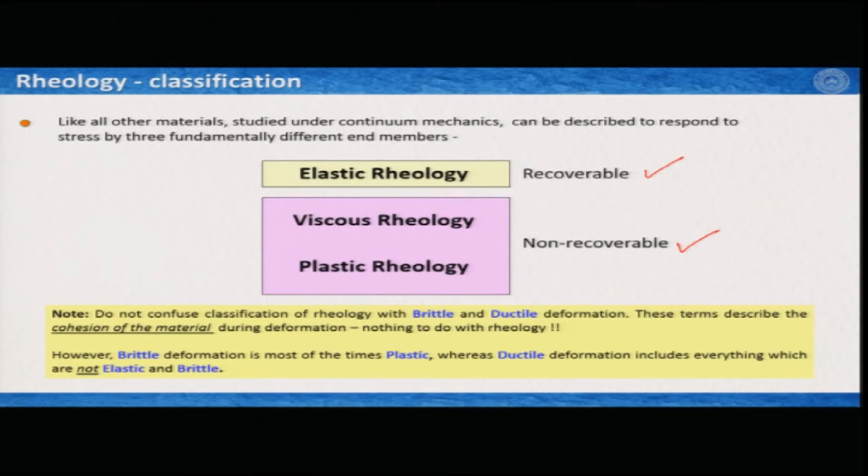I will mostly show you the classic considerations of these three rheological terms, their analog visualizations, that is, the best way to represent this rheology with some known materials we have, and then we will derive some different material constants or rheological constants, and we will see their implications also in the study of structural geology. So, let us start with the elastic rheology.

Now, the definition of elastic rheology is given by Hooke's law, and it says that stress is linearly proportional to strain and the latter is fully recoverable. As I said in the previous slide, in elastic rheology you can recover the strain, and elastic rheology is best visualized by a spring, or you can have any elastic band or rubber band: if you stretch it, it expands, and if you release it, it comes back to its original position. But if you stretch it more, it does not come back to its original position, but that is something different.

So, let us see what we can take out of it. We have this particular group of images here. This is written T1. At T1 we have one spring, it has a finite length, and then at T2 I have added one little load here with this green bar. Because I have added this little load, if the spring is hanging and I add a load at the end, the spring would expand, and therefore the length has changed. If I add more load, the spring would further expand and change the length, and so on.

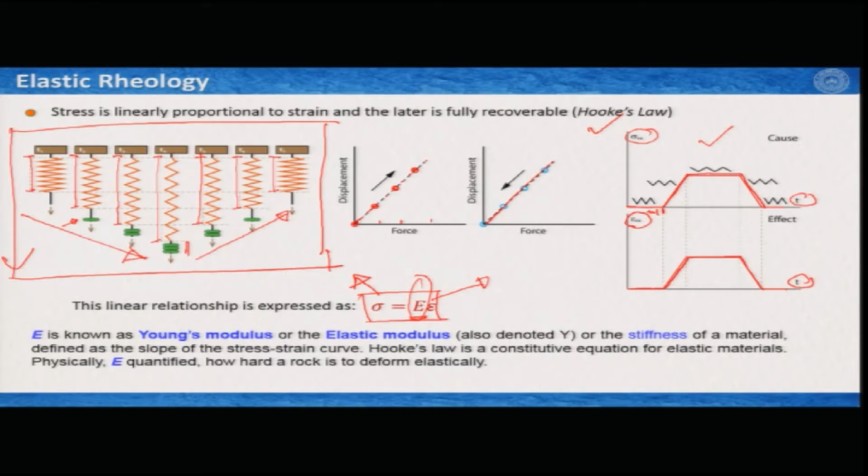Now, to talk more about elastic rheology, as we have understood, elasticity is time independent. That means, it does not matter how long you keep the green bars, it would stay at its position, and when you remove the green bars, it would come back to its original position. It is not a function of time. Therefore, the ideal elastic material would come back to its original position irrespective of the time the stress is being applied within the elastic limit.

And of course, the rate of stress application would increase the rate of deformation linearly. Now, if I add more green bars and I do it quickly, then the elongation of the spring would happen also very quickly. So, stress versus strain is a linear curve. This is the relationship we got: sigma equal to E multiplied by strain.

So, therefore, the slope is your E or Young's modulus, and if I increase the stress rate, that means if I increase the loading rate, then strain rate would also increase linearly. So, we can write sigma dot, which is actually sigma by t, equal to Young's modulus times epsilon by t, or epsilon dot. So, this is again the Hooke's law.

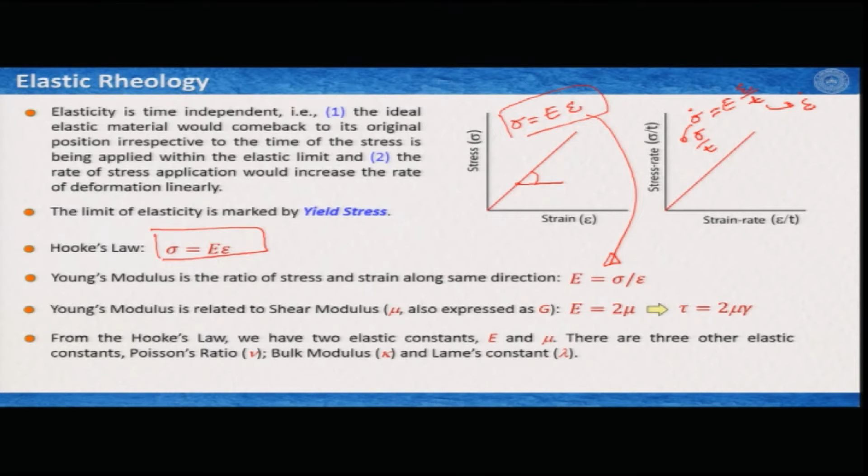Young's modulus therefore, from this equation, is the ratio of stress versus strain along the same direction. That is important: you cannot measure stress in one direction and strain in another direction, divide them, get a ratio and say this is my Young's modulus. That is wrong. You have to measure them along the same direction.

Now, you can replace Young's modulus by another constant, which is called shear modulus. So, if you shear this elastic material instead of extending it, this is known as mu, and sometimes it is also expressed as G. So, you can equate Young's modulus to twice the shear modulus, and then Hooke's law takes the shape of tau equal to 2 mu gamma, where tau is your shear stress, mu is shear modulus, and gamma is your shear strain.

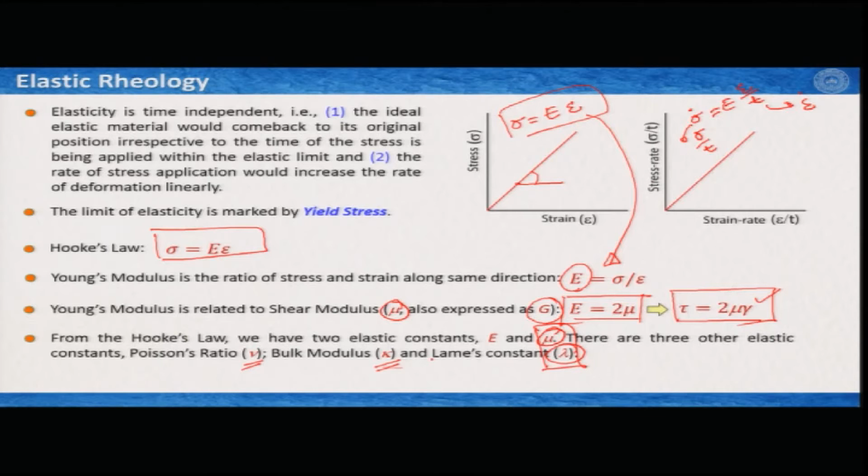So from these we have already found two constants, one is Young's modulus and another is shear modulus. However, from Hooke's law we can also get three other elastic constants: Poisson's ratio, bulk modulus, and Lamé's constant. In fact, in some textbooks mu and lambda together are referred to as Lamé's constants. Poisson's ratio is generally referred to by the Greek letter nu, and bulk modulus by the Greek letter kappa. Let us see what is Poisson's ratio.

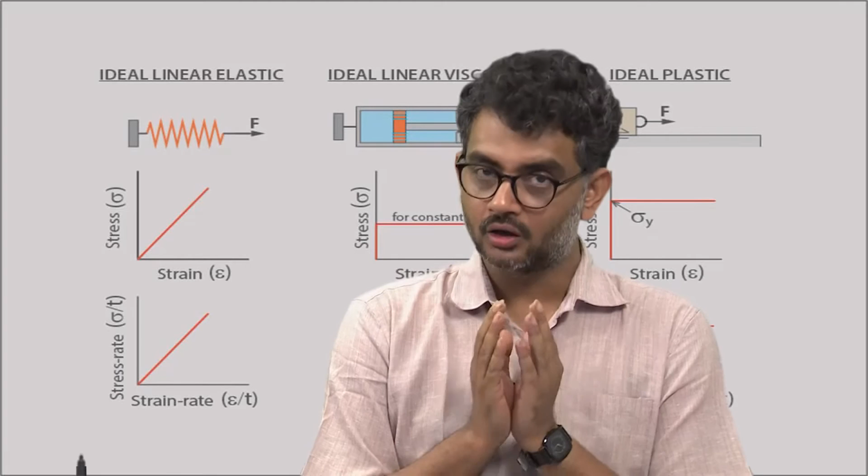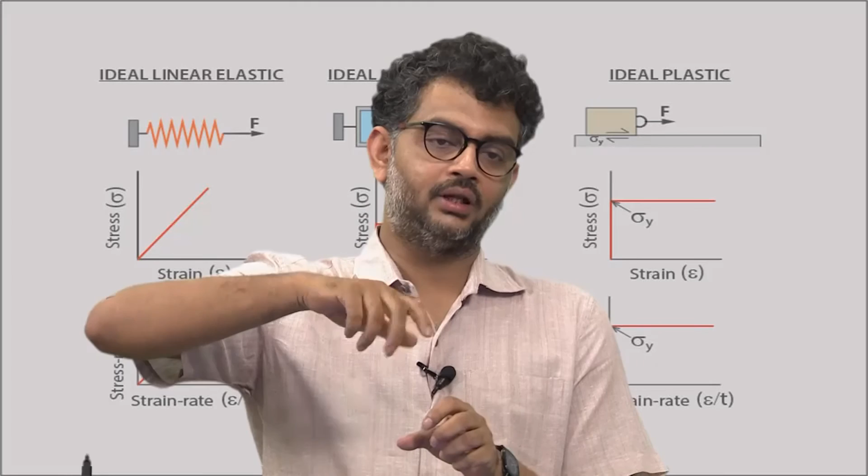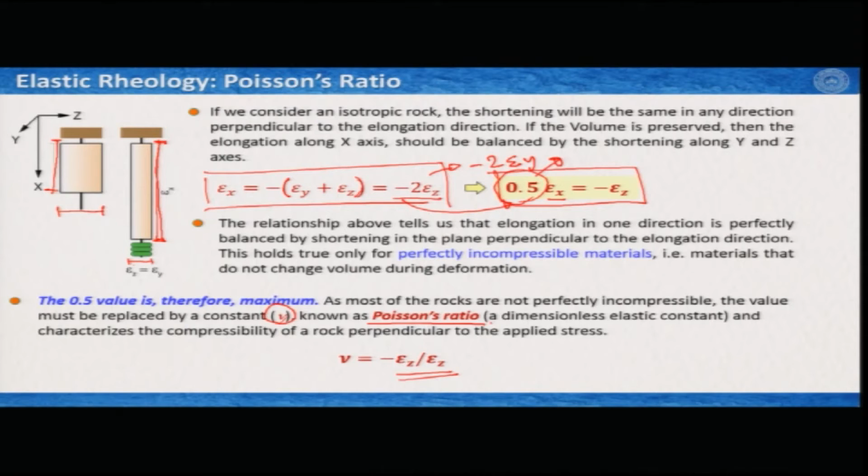Now, I give you a very simple example of Poisson's ratio. You may have seen some glass bottles where, instead of caps, we seal the glass bottles using corks. Now, corks are a very interesting material, because if you have the bottle and you have to press the cork inside, and if the cork has to maintain its volume constant, you are compressing it this side, so length is shortening in your compression direction. So, it has to expand in the other direction.

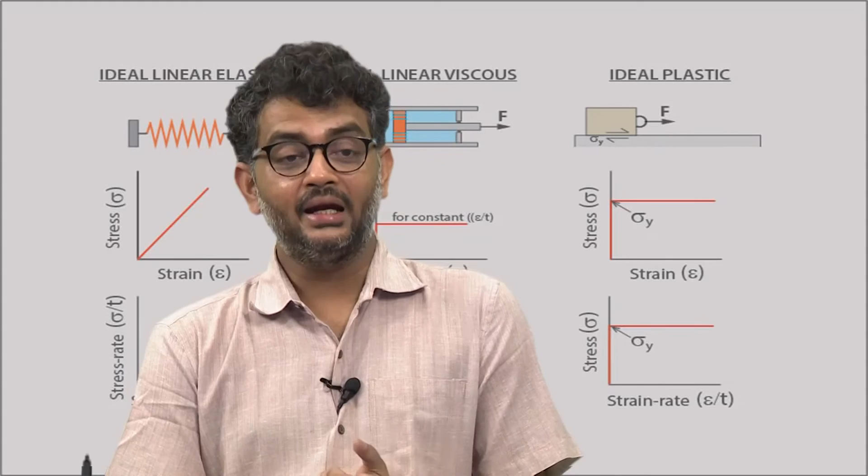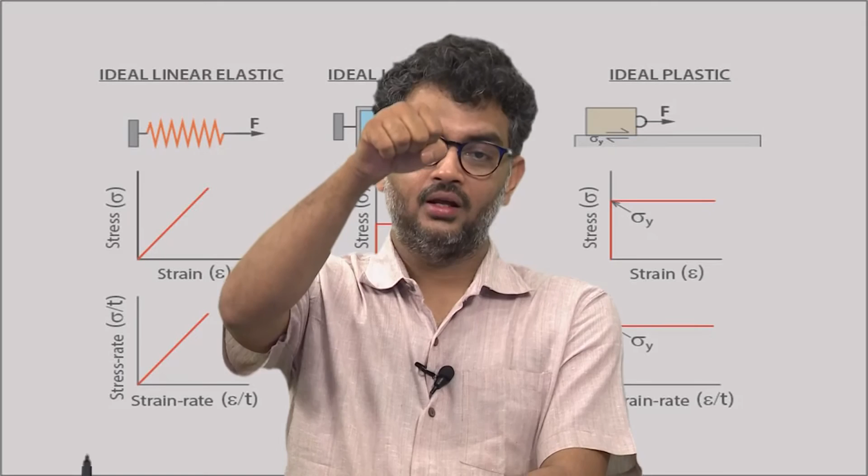That means the cork is now expanding and it cannot go inside the bottle's mouth. But cork is such a material that this expansion is very small, and therefore we use it to seal the mouth of a bottle. There are some other materials that have a negative Poisson's ratio. That means, if I compress this side, instead of expanding on this side, they can also shrink, or if I extend something this side, instead of compressing on this side, they actually extend. These are some complex composite materials. Honeycomb is one example that has a negative Poisson's ratio.

So, most of the rocks that we generally consider in a wide range of conditions have a Poisson's ratio between 0.2 to 0.33. It is not a very wide range, but in terms of Poisson's ratio, it is pretty wide. Now, 0 or negative Poisson's ratio, as I talked about, is also possible for a few special materials like foam and honeycomb, but extremely rare for rocks and minerals. Negative Poisson's ratio we do not see for common isotropic rocks or minerals, but people have reported very slightly negative Poisson's ratio in some particular directions of some anisotropic minerals.

So, you can also express the Poisson's ratio in terms of the velocities of P waves and S waves. Now, this is a little difficult to understand right at this point, but if I tell you that these seismic velocities that we consider, P waves and S waves, are elastic waves, and we are dealing with elastic rheology, there must be some sort of relationship. So, what is a P wave?

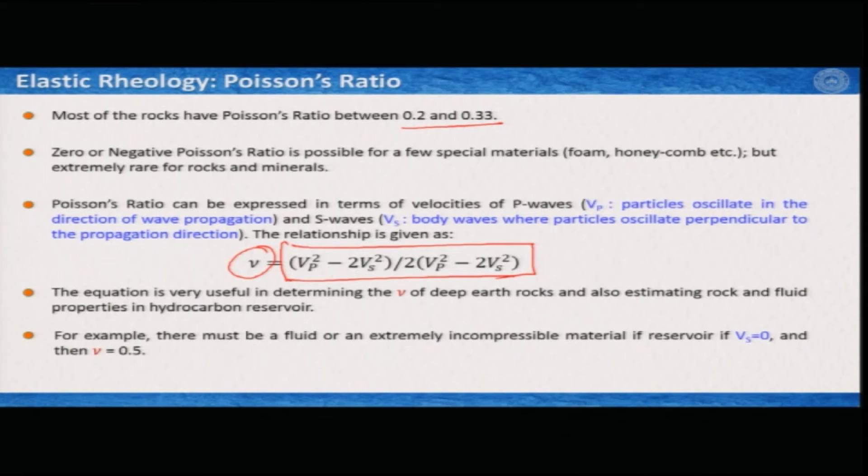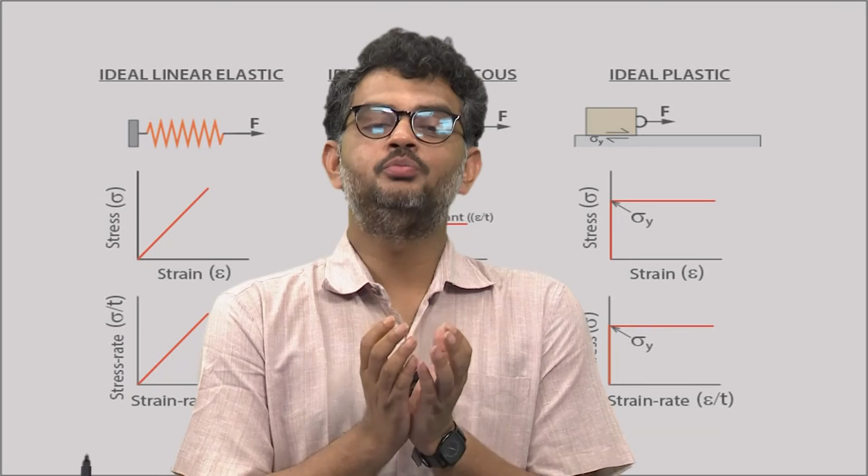Now, we have learnt three elastic constants: Young's modulus, shear modulus, and Poisson's ratio. Now, let us talk about the bulk modulus. The bulk modulus, or kappa, is the inverse of the compressibility of the medium. In general, it measures the relative volume change of a fluid or solid in response to a pressure or mean stress change. We have learnt what mean stress is in our stress lecture.

So, volume change is defined by del V over V0, where del V is V1 minus V0, and V1 is your changed volume. I just write it because I think I confused you with my statements. So, V1 minus V0 by V0, which you can write as del V by V0. That is the relative volume change of the material with the change of pressure. If I increase or decrease the pressure, how much volume change the rock experiences within the elastic domain, that is your kappa or bulk modulus.

So, you can write it this way: this is your pressure change and this is your volume change. With some calculations and relationships, you can express kappa in terms of shear modulus and Poisson's ratio, or Young's modulus and Poisson's ratio. This equation says that you need more pressure to compress a rock when the bulk modulus is high.

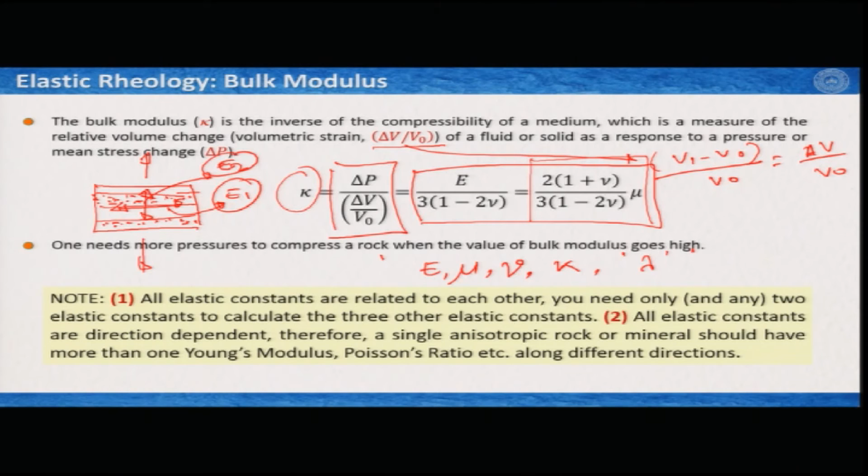Now, the generalized Hooke's law is a little expanded from what we have learned. This is sigma equal to Young's modulus multiplied by strain, but this equation is typical, and you can see that it does not include any direction that we talked about; it does not include the anisotropic components. So, therefore, the generalized Hooke's law is written in this tensorial form. We know more or less what a tensor is.

So, sigma ij equal to C ijkl epsilon kl. Now, sigma ij for 3 dimensions, i equal to 3, j equal to 3, so you can have 9 components here, and for 2 dimensions you have i equal to 2 and j equal to 2, then you would have 4 components there. So, sigma ij here is the total stress tensor, epsilon kl is the strain tensor.

Now, this term C ijkl describes all elastic constants in one house. This is stored in one matrix, and this is known as the stiffness matrix. Now, this stiffness matrix you can represent by 81 coefficients, simply because you have 9 components here and 9 components here. But we know that sigma ij and epsilon ij are symmetric tensors, and each of them can only have 6 components. So, the 81 coefficients of C ijkl reduce to 36.

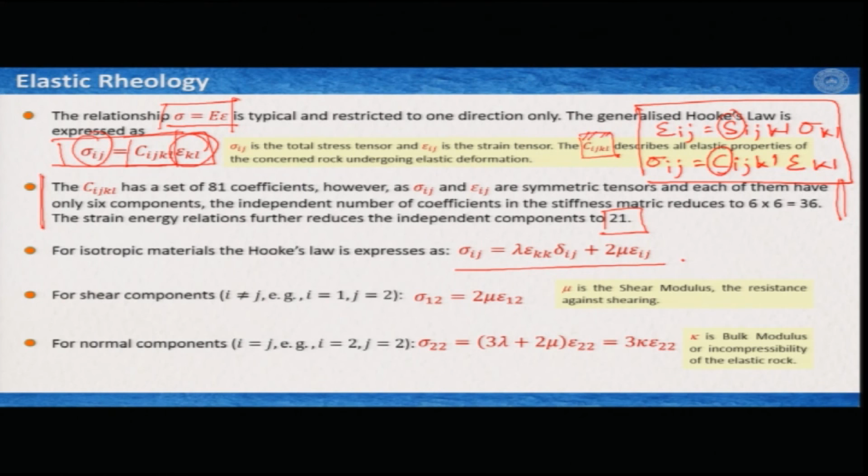So, for shear components, i not equal to j. If I consider i equal to 1 and j equal to 2, then we can write sigma 12 equal to 2 mu epsilon 12, because the Kronecker delta for i not equal to j becomes 0. So, this term vanishes, and here we get mu as the shear modulus. So, you can see how from the generalized Hooke's law we can derive the shear modulus, just taking into account the shear components of the matrix.

And for normal components, i equal to j, so the Kronecker delta value is 1, and this can be expressed with some algebraic calculations. You can represent it further by this, and therefore you get the bulk modulus from this equation. Now, this is how it is done.

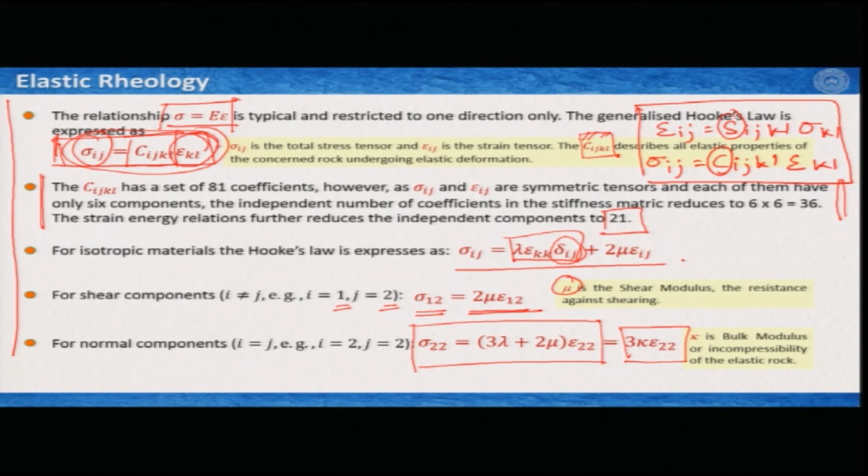For this slide, I would recommend that you do not have to go into all the details of this equation and how it is derived, but it is important that from the stress tensor, when we apply this to the elastic field, it has some normal components and some shear components. When we apply the normal components, we get the bulk modulus related to volume change. You remember the mean stress and other issues.

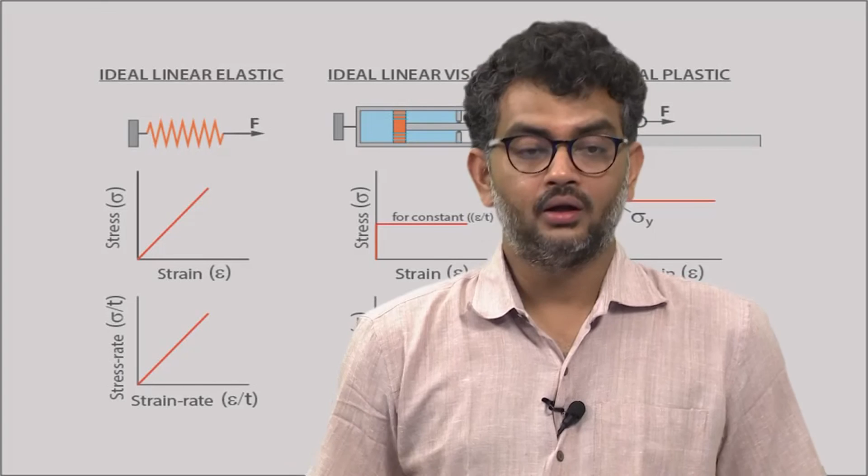And when we are not dealing with the normal components, that means off-diagonal components where shear stresses are acting, then simply by considering i not equal to j, you can get the shear modulus of the elastic material. Now, with this I would stop, and then we will move to the next topic, viscous rheology.